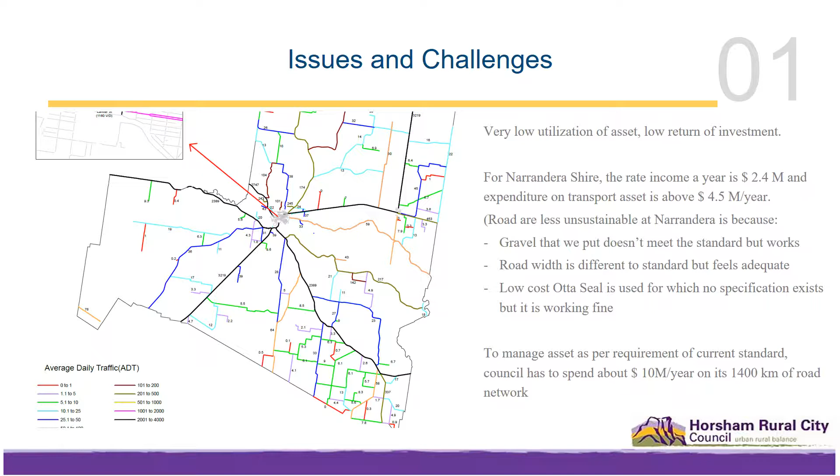If we follow the standard for the same service level, the cost would be about 10 million, which means from the same money, we'll be able to produce half the result. The cost of not following, not working, something is massive. That is $2.4 million as an income and $10 million as expenses. We can't sustain long from this one. Thus, it's time to act.

Therefore, we set up goals to develop quality, reliable, and resilient infrastructure to support economic development and human well-being. Our aim is to increase the proportion of rural population who live within 2 kilometers of an all-season road.

Impact. The impact of the project that we're looking at is, as discussed above, a huge amount of resources has been wasted because we are attempting to comply with standards which were never built for the purpose of rural communities. We can see that if we make a standard looking into the economics, ecology, and risk factors of rural Australia, then the same amount of money will produce more result. Thus, we'll be able to achieve our mission.

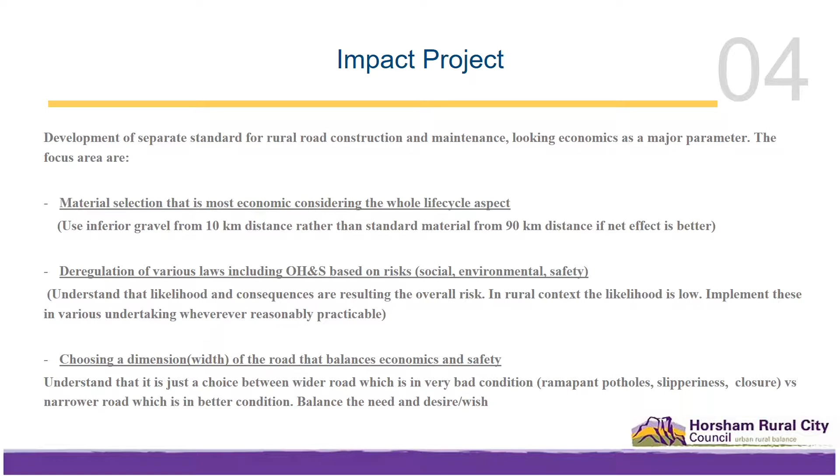This includes road making material for the rural context, deregulation of the various laws which are obviously not applicable in the rural context, and finding solutions that are meaningful, including the other example. Based on the current standard, rural roads are economic if unsealed. However, our analysis proved that sealing the same road is much more economic in the long run, which is obvious from this chart.

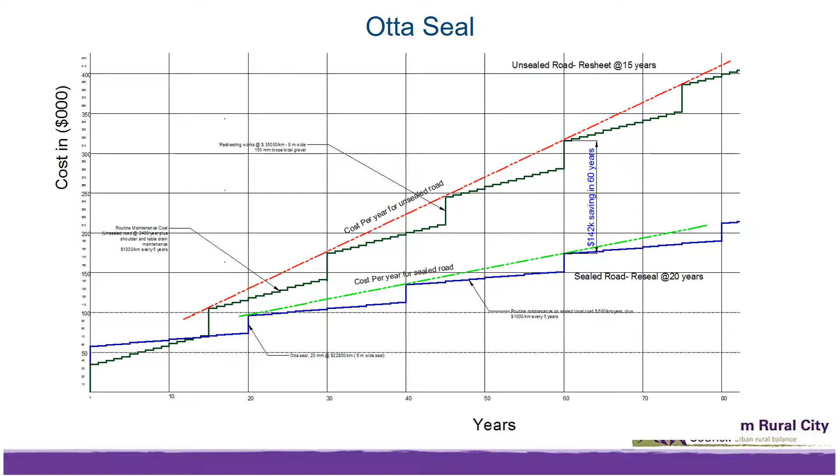Also, another question is about how long the seal lasts, the useful life of the seal. The current standard says that a rural seal lasts about 12 to 14 years, but from our research, together with ARRB, we found that the seal lasts in the rural context more than 18 years.

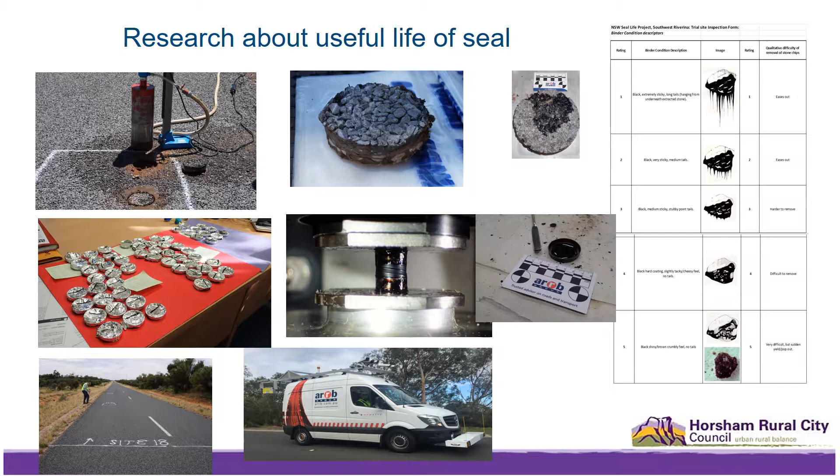A bridge assessment project. Based on the current standard, a particular bridge was analyzed as needing to be replaced. But after rigorous analysis, we found that the bridge has enough capacity. So the standard is not considering the rural factors.

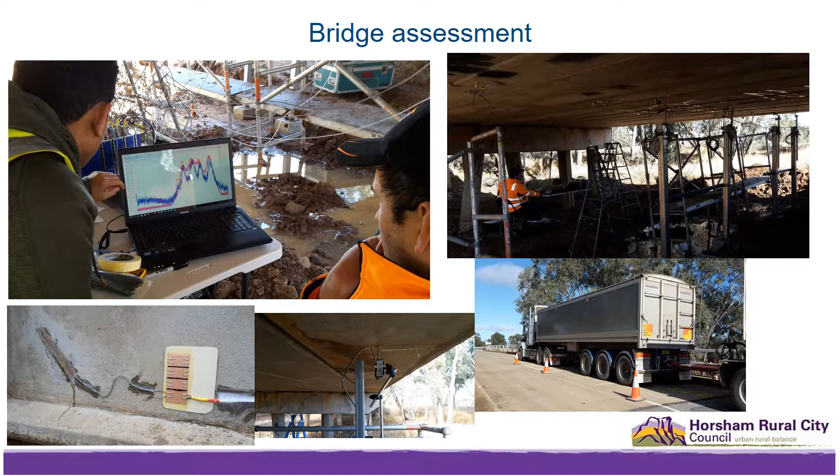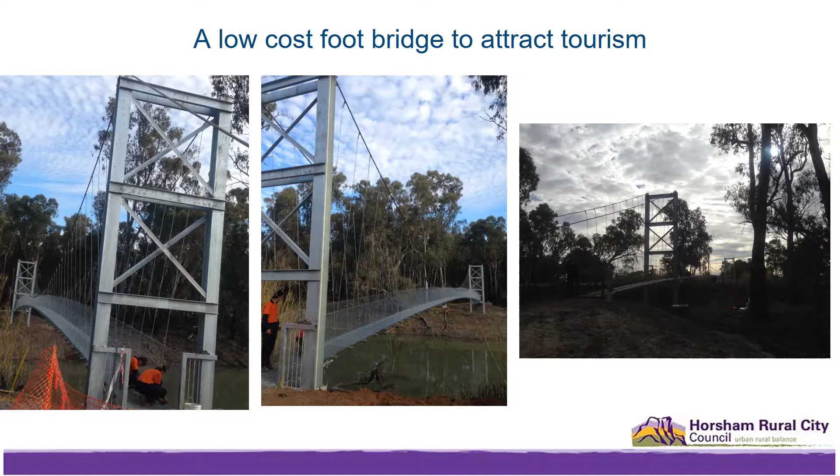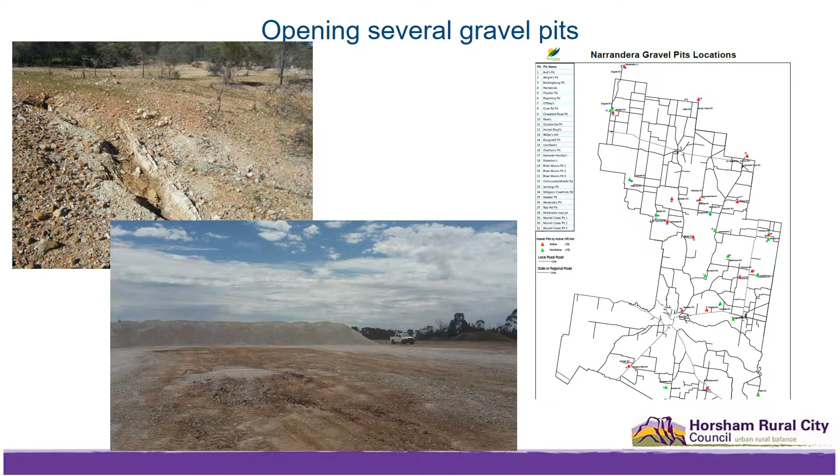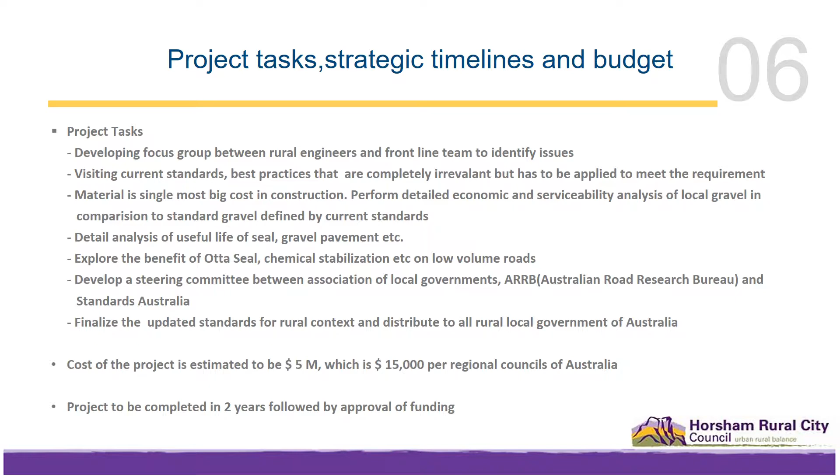Therefore, we want to unite all rural local governments, collect their experiences and issues so that we will be able to produce standards that suit a rural community. After the project, we'll work with Standards Australia and the Australian Road Research Board to include these findings in the form of a standard. The project may cost in the range of around 5 million.

About some subjective way to demonstrate the return on investment. The current idea in the engineering community that sealing a road is costly is proven to be wrong, which I presented in a graph before. Also, the current idea that we should reseal a road every 10 to 12 year cycle is wrong. That means if we seal that road in 12 years, you're wasting resources because you could have waited another 3 years.

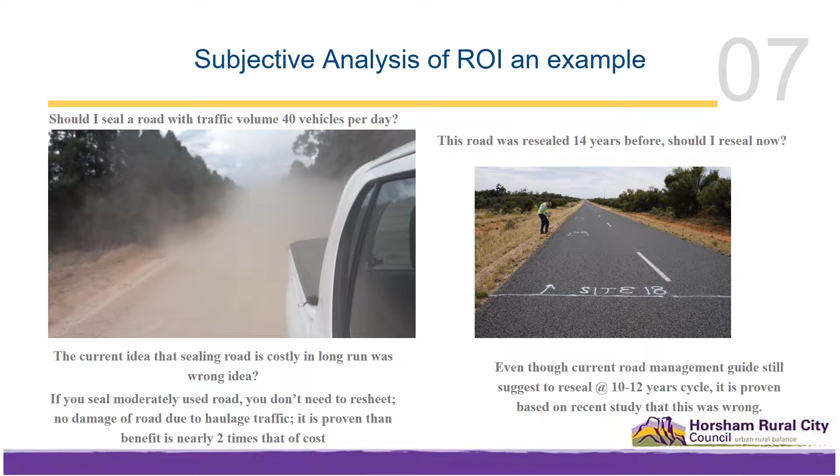If you look at this chart, this is an analysis of how much money is required to reseal the entire sealed road network of Australia for different frequencies. The standard at the moment is 10 to 12 years. You're looking at needing around $730 million a year of reseal budget.

While if that is incorrect, or if you find an innovative way of sealing which lasts 20 years, we'll be saving $300 million a year. So that is a massive saving. So this project has an enormous potential.

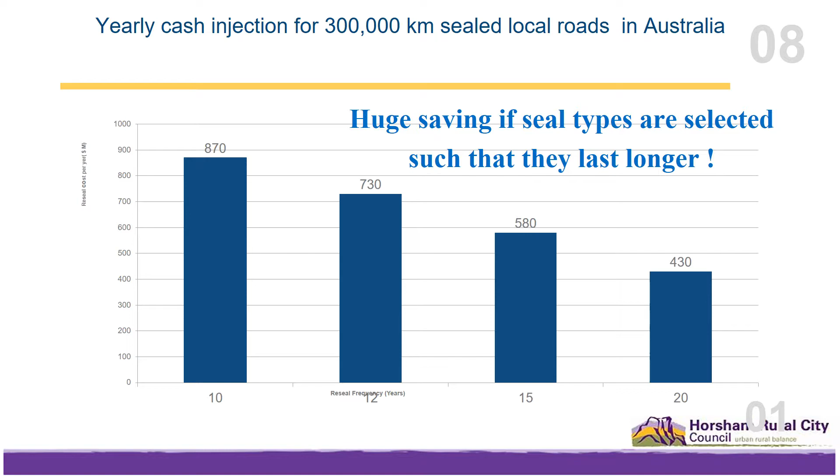So it is important to note that if a company produces a standard for high volume roads, the document will be useful for the entire world, because most of the population of the world is living in cities. So those standards are useful in those areas. Therefore, the tendency for these people is to produce standards for those high volume roads. So they always miss the low volume roads in their development. So making a difference in rural communities is our necessity.

We, all rural local councils, need to work together to produce something that is suitable for our needs. Let's stop copying the standards from main roads to local roads. It simply doesn't work. Let's join hands to solve this issue for the benefit of our community, economy, and generation.